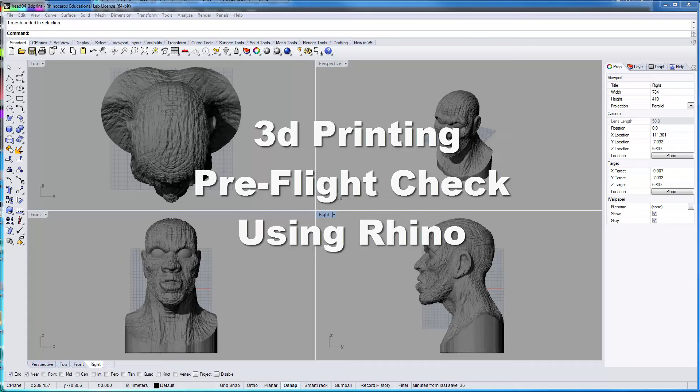Today what we want to discuss is preparing our files for 3D printing and some pre-flight checks that we want to do before we output our STL file. Here we have the OBJ file that we brought in

from Maya via Mudbox that's closed, and we want to do some checks. Before we get into our checks, the first thing we want to do is select our object like so, and hit CTRL G to group them together so that the eyeballs are grouped together with the head. That's the first thing we want to do.

Is make sure that the eyeballs are grouped with the head. Now what we want to do is select our model and type in the command check. This checks our model to see if there's any problems, and this is usually a really good diagnostic that you can do

to check to see if your model is okay. As we look at the model, this is a good mesh. That's all good signs, means everything's pretty good. Actually, there are three meshes, two right there, and this is a third. Some things to look at here.

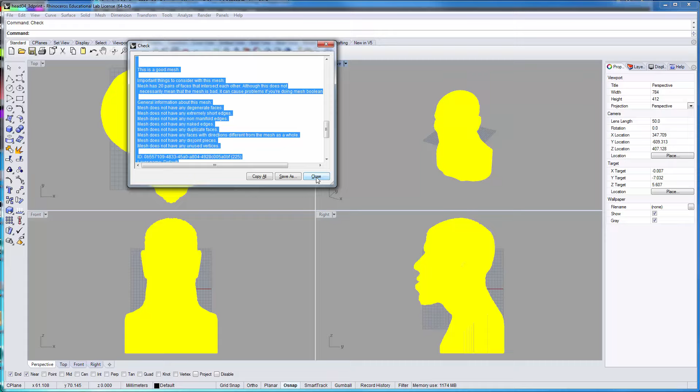We do have some pairs of faces that intersect each other. Not a big problem in this case. But generally this is a good mesh. Mudbox produces meshes that are fairly good. The only problem you may have is some intersecting faces in them. So we know that we have a good mesh.

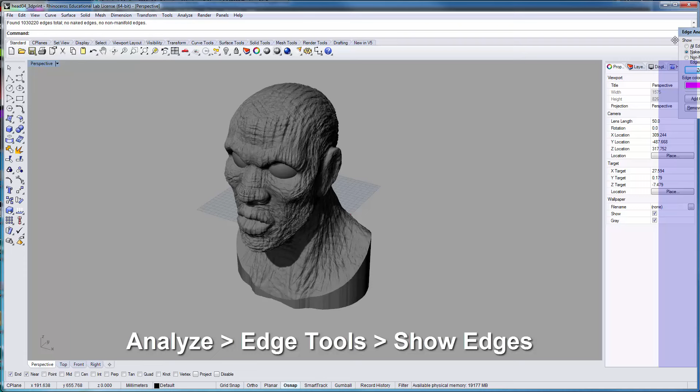Now the next thing we want to do is come in here and run analyze edge tools, show edges, and this is another analysis that we can do. We want to make sure naked edges are checked. One of the things we see here is there are over 1 million edges, but there are no naked edges and no non-manifold edges.

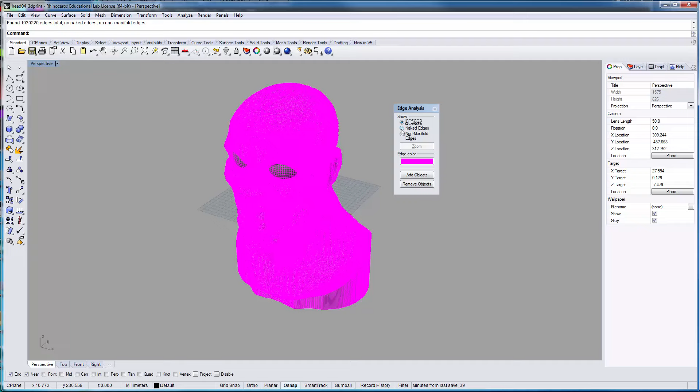A non-manifold edge is an edge that's not closed on all sides to the mesh, but this is a good mesh. If there were any naked edges, they would be pink. Like if we come over here and select all edges, you notice how our whole model goes pink because it's selecting all the edges in our model.

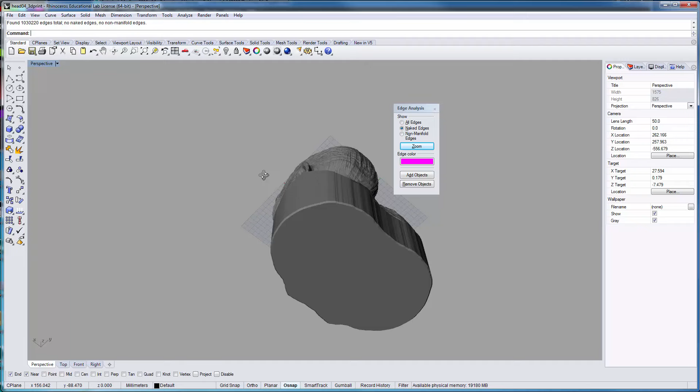Now we want to just turn off naked edges. Some common problems you may have with a mesh as it relates to 3D printing: if you look at your mesh in Rhino, right mouse click to dolly, and for some reason some of your faces are either see-through or they may appear black. That may indicate a normals issue.

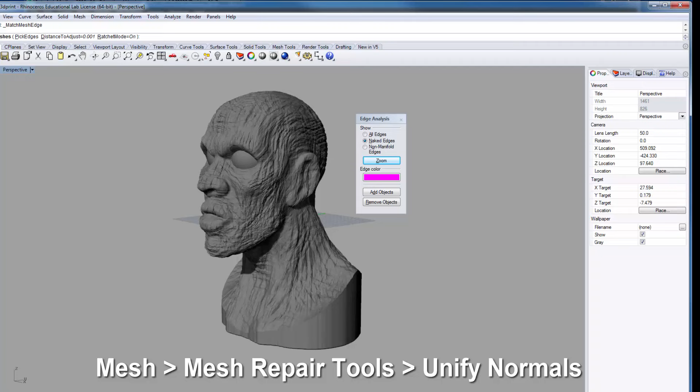You would come in here to mesh repair tools, and what you'd want to do is unify your normals - mesh repair tools, unify normals - and that would generally bring your normals together. Okay, so the mesh is pretty good.

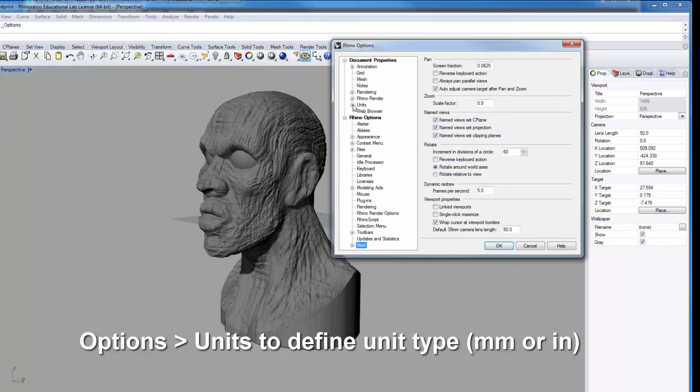Now what we want to do is scale our object properly. To do that, let's first click on this little gear here, which brings up our options palette, and we want to go into our units. You can use either millimeters, but I'm going to go to inches, and click OK. So now my grid is in inches. I'm not going to change this, I'm going to leave this at no.

I could have done that, and it would scale it down significantly, but I'm going to leave it like this because I want to show you how to do a scale.

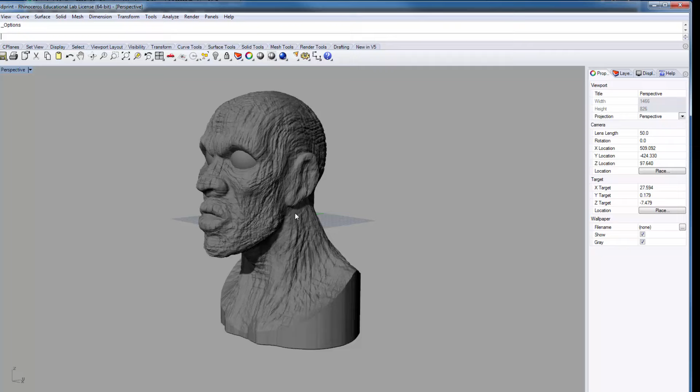Okay, so now let's double click, and we want to come over here to our front window, and we want to get our scale tool, which is located here, Scale 3D. I'm going to turn on Ortho Snap, like so, and I'm going to select this object, press enter, and I'm going to select the point that I want to scale from, and here I'm going to select my second pivot point, and now I'm going to scale this down like so.

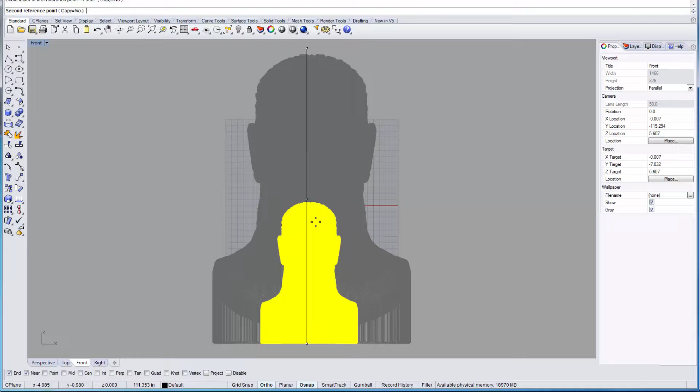Okay, and I've scaled that down significantly. Now the next thing that I want to do, since my object is all the way over here, I'm going to take this and move it up here like so. And I can use this tool right here to zoom it in like so.

And I'm going to move this up, put it on the 0 line over here, and I'm going to move it over and center it like so. With the ortho snap on, I can only move in 90-degree increments, and I kind of like that.

Okay, so right now my model is 1, 2, 3, 4, 5, 6, 7, 8 inches, almost 8 inches tall. That's just twice as big as I'd like for it to be.

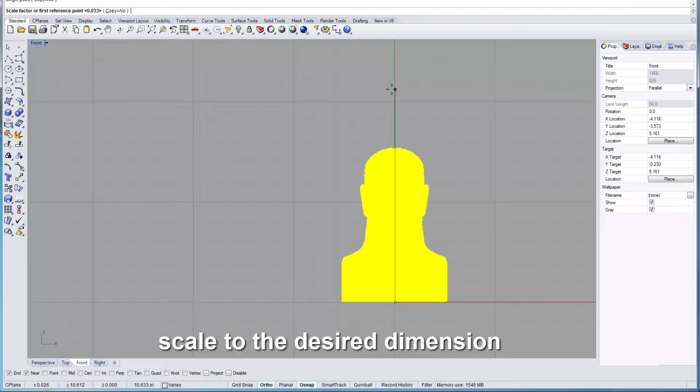So I'm going to come in here, I'm going to get my Scale 3D again, and I'm going to scale this down to about 4 inches. We were working with about 4 inches as a good size for this 3D printed model.

Okay, and so there we go. And now it's scaled to 4 inches tall, and I'm going to center that again. Okay, and now our model is scaled properly.

At this point, it's a little bit taller than 4 inches, so if I wanted to, I could get my scaler again, and I'm going to show you that I could go this way, and I'm going to bring this right down to, so it's just under 4 inches, and that's good.

At this point, I'm ready to export my file as an STL file, and that's fairly straightforward because this is nice and clean. The model is 4 inches, it's been scaled properly, and now I want to select the model, left to right, right to left. It selects everything it touches.

I'm going to do a file, export selected, and I'm going to choose from my selections here, I'm going to choose STL, stereolithography. Okay, and from there, what I want to do, I'm going to go here to D, to the folder that I'm going to put it in, and I'm going to call this Mudhead 01, and I'm going to save this as an STL file.

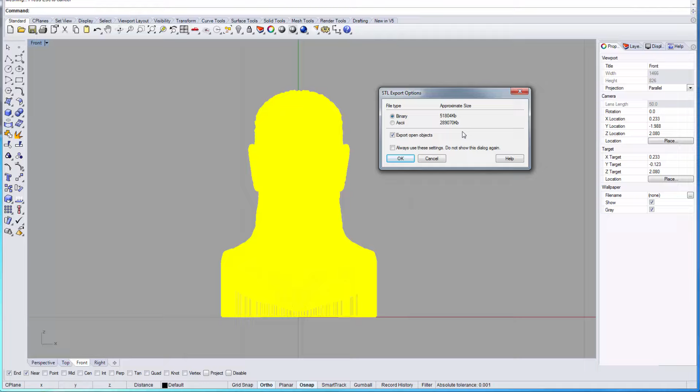And what it's going to do here, it shows me the binary size of the file, and ASCII, you'll almost always use the binary size of the file. When we get into Rhino modeling and converting NURBS to STL, that's a discussion for another day. But here I just want to do this to show you how you do this.

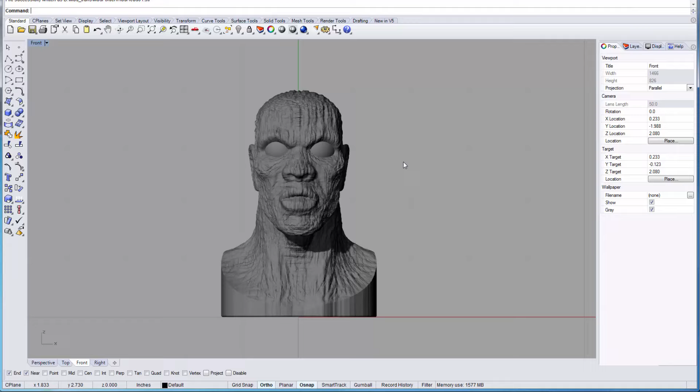You click on OK, and there you have your STL file, and it's going to be approximately 51 megabytes, as we saw. So at this point, you have scaled your model, imported your model in from Maya, your closed model. You've run your check on it, you've run your naked edges check on it, and you have output the model for printing, for 3D printing, as an STL file, and that's the basic workflow. Good luck.